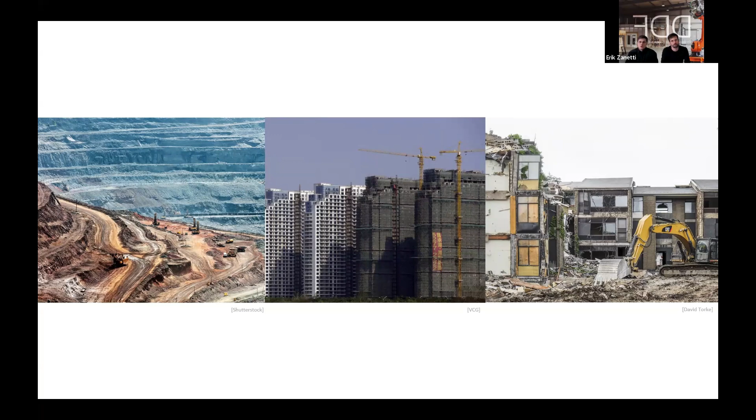So the motivation behind our research comes from the overconsumption of resources in construction. As you probably know by now, the industry is responsible for a very large amount of extracted materials, nearly 50%. And on top of that, the linear economic model that we currently use creates a lot of waste. For example, in the European Union, that accounts for 35% of all waste produced. So this raises a lot of environmental sustainability challenges, which is what we aim to address.

And as the title of our presentation suggests, our research focuses on the circular economy. So we explore solutions within both the biological and the technical cycles. When we talk about the biological cycle in construction, we are talking about, in our case, introducing innovative renewable materials. And when we talk about the technical cycle, we are talking about how we can use reclaimed materials, but also how we can design building systems that can be reused or recycled.

For example, we explore ways to expand the use of bio-based materials in construction. You can see on the left, one of those that we use is willow, along with earth-based materials and reclaimed materials, in particular reclaimed timber. And the common thread connecting all of these topics is that our research works with materials that are non-standard or not standardized, which means that we have a lot of inhomogeneous traits or highly variable properties. And this is something that usually we cannot deal with within the realm of construction.

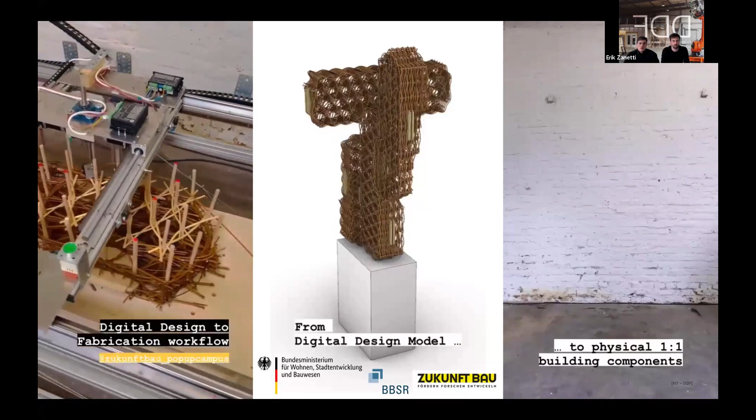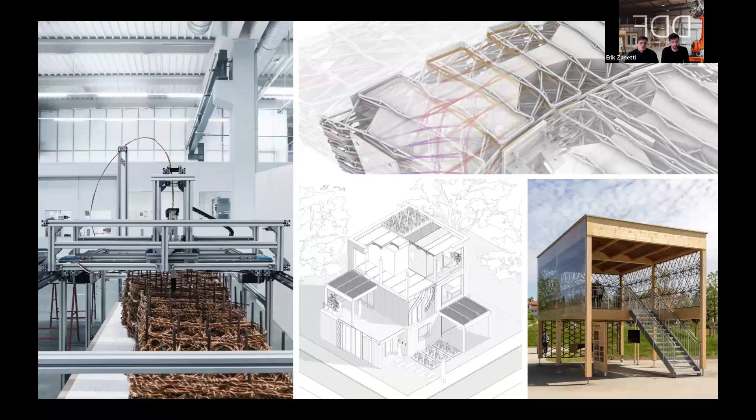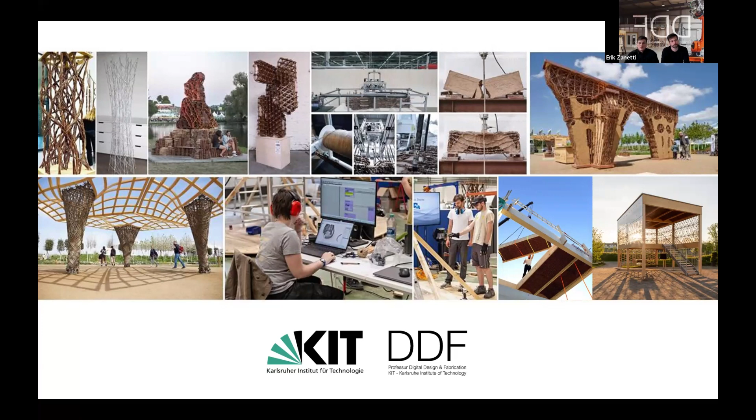So what we focus on is how we can leverage digital techniques to manage the complexities of these materials and to develop new methods that can help us overcome the current limitations. That can be fabrication limitations or design limitations. And our aim is to eventually introduce them into construction relatively quickly. As part of this aim, you will see that our research evolves from experimental to applied, and we try to deal with all aspects of construction and architecture. We do this with a lot of research demonstrators and with a lot of professional figures from different fields, and we then fabricate these research demonstrators in our lab together with our students.

And coming back to this slide, today we'll walk you through two of our research lines and their progress so far. The first focuses on willow, a rapidly renewable material, and its combination with earth. Daniel will be presenting this. And the second centers on our research into reclaimed timber, and I will be presenting this one. And with that, I'll let Daniel take it from here.

I'm going to walk you through our research from the last 3 to 4 years in regard to fast regrowing materials, such as willow and also earth. Erik is going to walk you through our wood research, and research into reclaimed wood in particular, later.

But the slide that I want to start with is that even though wood is a very nice building material that has been widely used throughout history for building and construction, supply and demand don't really meet each other for the near future. Meaning that our industry at the moment requires much more wood than the market can supply, and that is also unhealthy, leading to deforestation of our forests.

So regrowing materials in that sense, for example willow, which I'll showcase in a second, can be an answer as a quickly regrowing material that doesn't have this cycle of, let's say, 10 years that a regular tree would have, but is so fast regrowing that already after 1 year there is some structure that we could use for architecture. So the way I walk you through is chronologically.

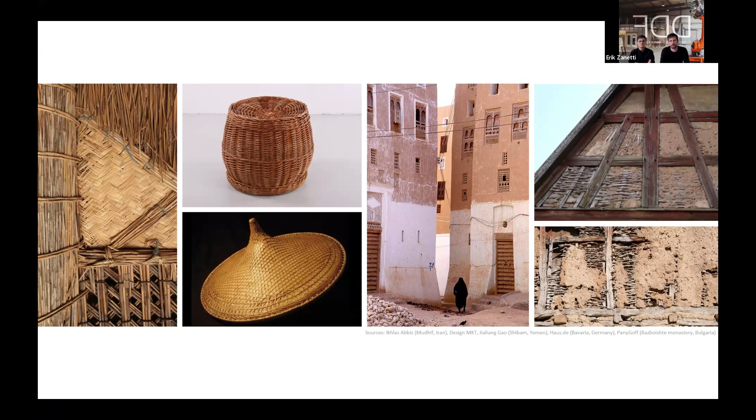From these manual tests, we rather quickly went into digital fabrication, and we asked ourselves the question: this whole process of manually weaving willow is really time-consuming, and neither the labor nor the time is available these days. So it has to be some kind of workflow that is digitalized, that can be optimized, and in the end become time efficient.

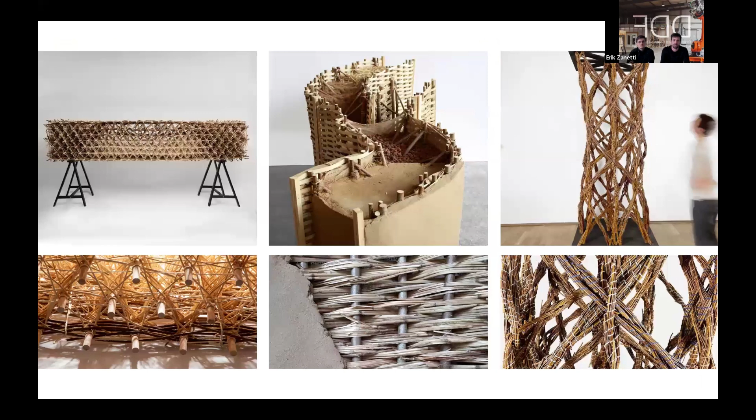As a result, we very quickly jumped into the one-to-one scale that we do at our professorship, which we think is a good way to experience early on difficulties that could come up in real applied work later. The examples you see here are, on the left, a beam with a span of 3 meters, a wall segment, and a completely free woven willow column. So already at this stage, we identified these 3 very characteristic building components, a beam, a wall, and a column, from which you could think of a lot of different applications for the built environment.

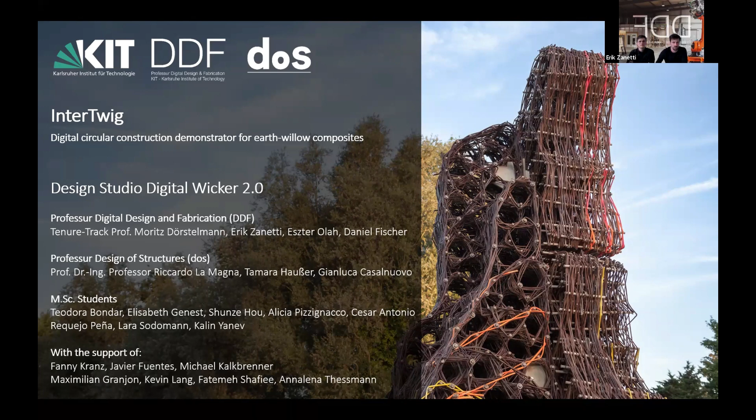Going from there, we had a follow-up project for a local festival here. The aim was, for a music festival, to present our research, but also to give the audience a place to sit and to inform them a little bit about the research that we are doing at this moment.

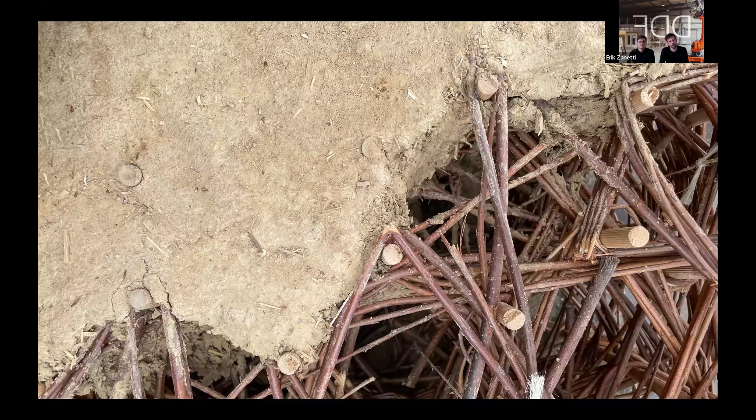And we looked into the material combination of willow on the one hand and also the natural material of earth. That's the second point that we're very interested in here at the professorship, the hybridity of materials. So not using just the pure materials, but looking into ways and configurations of how we can combine different materials and out of this hybridity make a stronger component.

The way we designed this here was also with a focus on prefabrication. It was with a focus on thinking on component level. So how could such a building component out of willow and earth geometrically, first of all, look? How could it come together?

How could it interlock? And maybe this picture that you see here, which looks very artsy, was of course also because it was an arts and music festival, but looking at this slide, you see already that there's a lot of computational design and a lot of computational workflows that informed our structure in the end.

So what you see here is the base, that's the bottom 3 layers. This is where we combined it with earth, always in these zones where we had pressure force. And on the top, there was just a vertical flip of the whole structure in which we tried to explore different kinds of patterns and depth and visibility that you could go through.

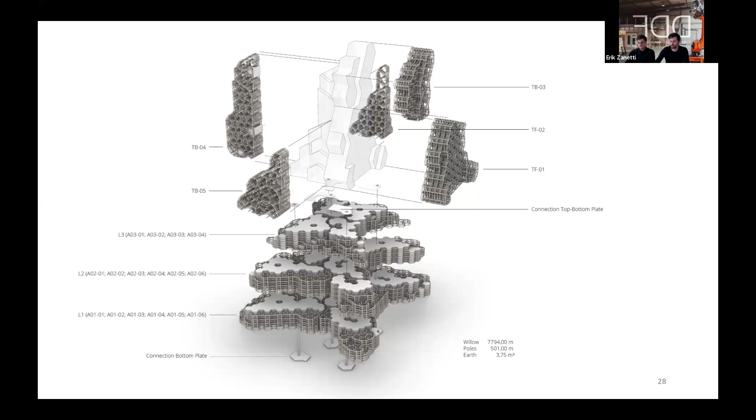Going more into detail of these components, you see that every layer, every fiber was computationally designed and informed from the very beginning. And these kinds of models would then also be the initial step that we use for fabrication. So this information goes into our fabrication setup,

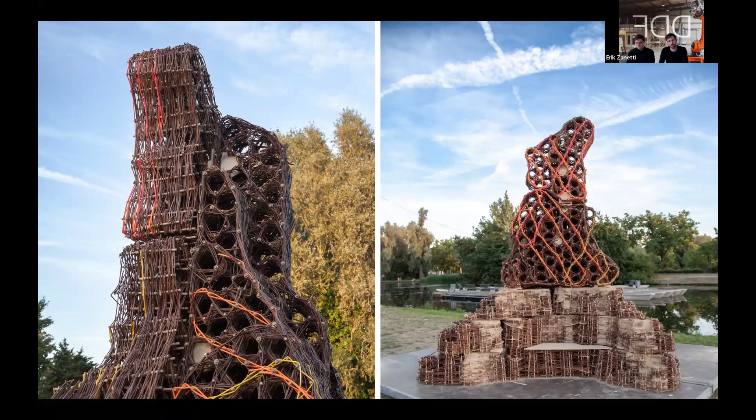and then in the end, together, of course, with a lot of help from the students here that work with us, forms these prefabricated components that were then transported onto site, assembled, and resulted in this very interesting first research demonstrator structure of this hybrid material out of natural fiber, willow, and earth.

Coming from this more arts and exhibition kind of design, the next step was a federal gardening show here in Germany. That was in '23, in which we tried to go from the sculptural aspect of this material system into a more building-oriented system, namely walls. So the configuration you can see here was meant for visitors to first of all explore again this material system.

So you have to imagine the Federal Gardening Show in Germany, the audience is rather broad, a lot of different people. And it was a great opportunity to inform them, get in touch with them, and talk a little bit about our digital circular approach to construction. And we used Reground, that was the name of this project, as a demonstrator of how we could prefabricate wall elements out of willow and earth.

And also use it as a showcase of how these components can be used in a circular manner for building applications. We started from the digital model, used all our analysis tools that you probably also use, Karamba, and then did the final calculations, final analysis, and always used this digital feedback on the placement of these different willow fibers.

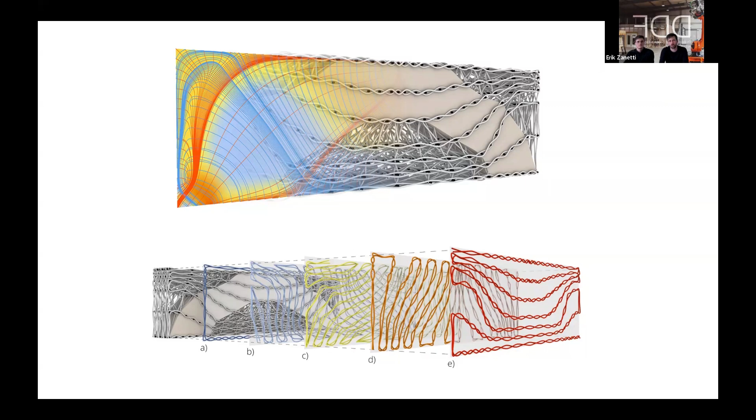So on the top, you see one of the components as an example, and on the bottom, how the different force analyses of these components also influence the laying of these different patterns and fibers and layers on top of each other. So in the end, they also respond to the structural analysis that we do for these components.

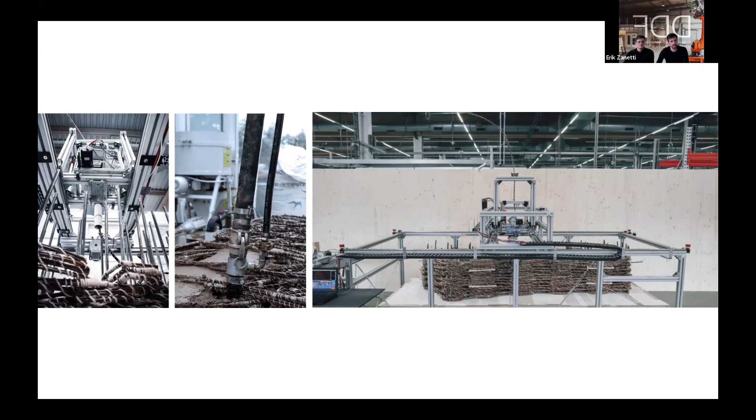For this project, we upgraded our fabrication setup a little bit. We went to a rather large-scale setup in which we were able to do components of 1 by 2 meters. We also upgraded it in such a way that we don't use single willow fibers, but we splice them together, which you'll see in a video in a bit. And we also used a machine for the first time to fill it with earth.

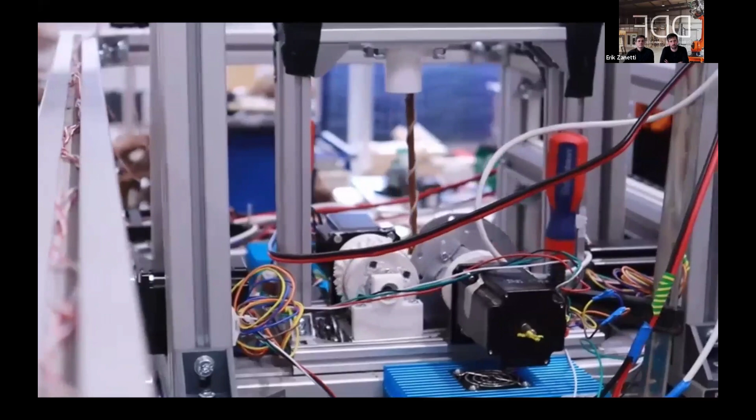I hope this video is fluent when you see it. So you see the fabrication process, in which our 3-axis machine is extruding the willow. And that's an interesting step in which we splice different willow fibers together into one, you could say, unlimitedly long natural fiber that is then laid on top of each other layer by layer.

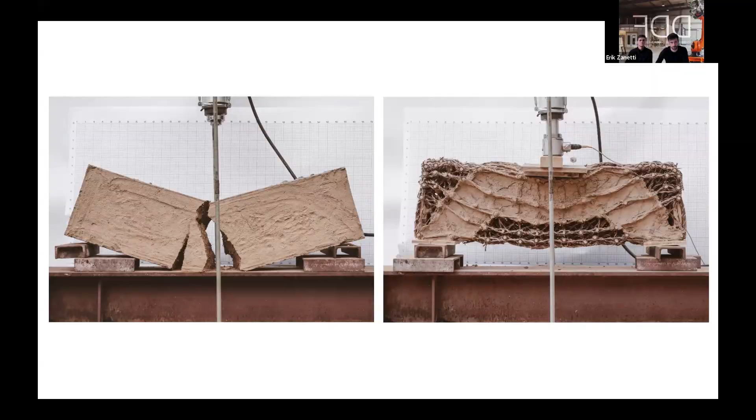Also to point out at this stage, it's interesting that on the left-hand side, a beam, for example, that is not reinforced, loaded with the same kind of load as the beam on the right side, is really less strong. So you could say the willow works as a natural reinforcement for these structures. And in our test, they are able to hold up forces up to 10 times or even more of the structural load.

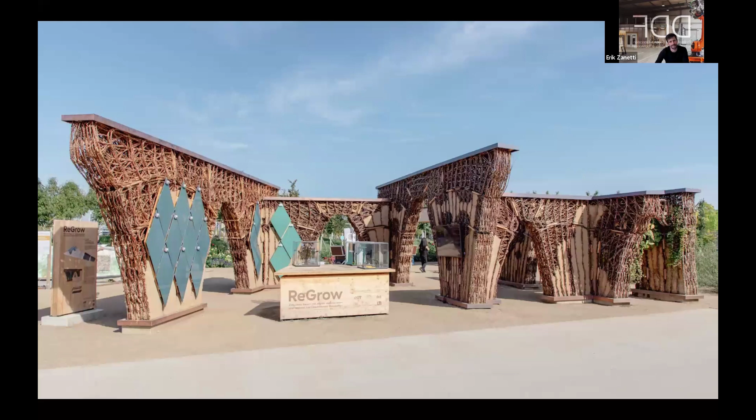Coming from this, we went into the prefabrication of the different elements. We loaded them again, put them on a truck, and then with the crane assembled them on site. Coming back to the slide that I showed in the beginning of the design, we ended up with this installation that gave the visitor the opportunity to walk through and experience different kinds of depth, different kinds of angles, to see how the spatial structure of the willow also works for different kinds of visual aspects, visual feelings.

Exactly. So then the next project. We had already worked in the artsy kind of aspect. We were sculptural, we had the wall structures. What we were missing was the horizontal elements, namely the ceiling slabs. For us, a ceiling element is a very interesting building element, since in its use it's very scalable and can have a big impact on the construction industry. And in particular, our research interest here was how this combination of willow and earth could work as a building system for ceiling components.

Usually, if we start on the left, over the centuries, wood and earth have been used in ceilings a great deal, but the earth mainly as a filling. That was for sound absorption, to give some mass to the ceiling components, but never really structurally. Then there was a development that the structural aspect could come from a geometrical shape, for example, structural caps. But what we tried to do with this research is to combine all of this into one building component.

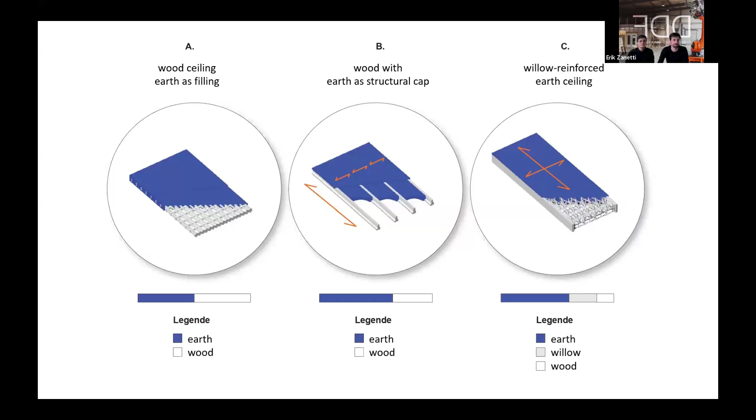We try to reinforce with the willow, as you've seen in the picture that I just showed with this beam, to use the willow as a rebar. You could compare it to steel reinforced concrete. In our case, it's willow reinforced earth. So these components can take loads in multiple directions, not only in one as the cap, or not only as a filling, but into several directions.

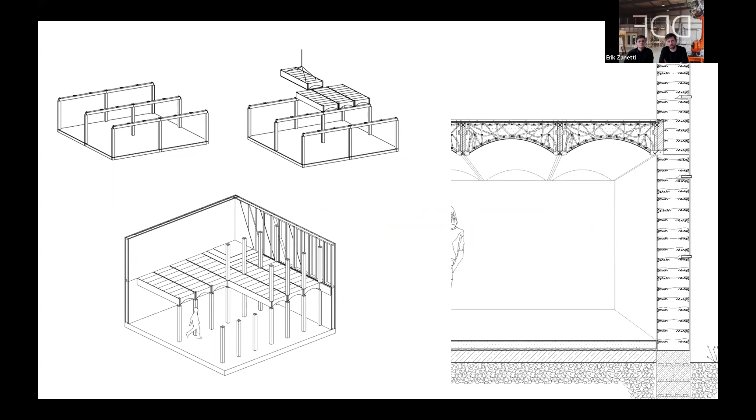So the idea here was, again, prefabrication, again, the material system of willow and earth, and then have them as a component that can be prefabricated in a nearby company, delivered on site, and used in multiple kinds of architectural systems. Here, for example, columns could also be a wood frame structure. It could be monolithic walls. So we designed it with a minimum amount of wood, thinking back on what I said in the beginning, that the supply and demand of wood don't really meet. So we try to use wood only where it's necessary.

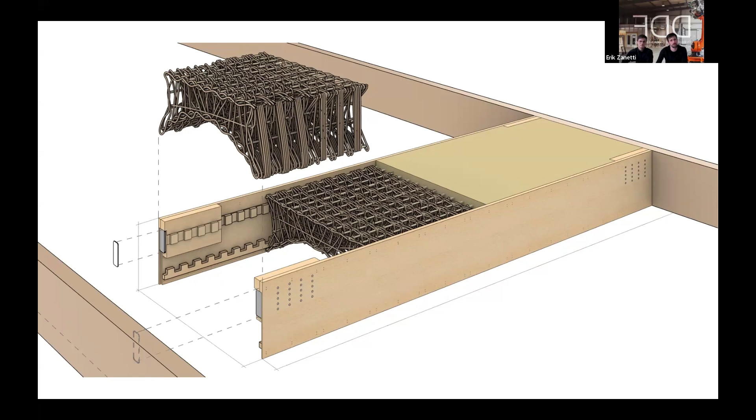We had these two thin wood beams on the left and on the right side of the components. Then geometrically, you see there's a kind of interface between the willow baskets and the wooden beams. And this all got filled with earth. The nice effect of this geometrical design and the combination with the willow was that in the end, here you see the component, since it was filled, we got a component that was structurally loadable in multiple directions.

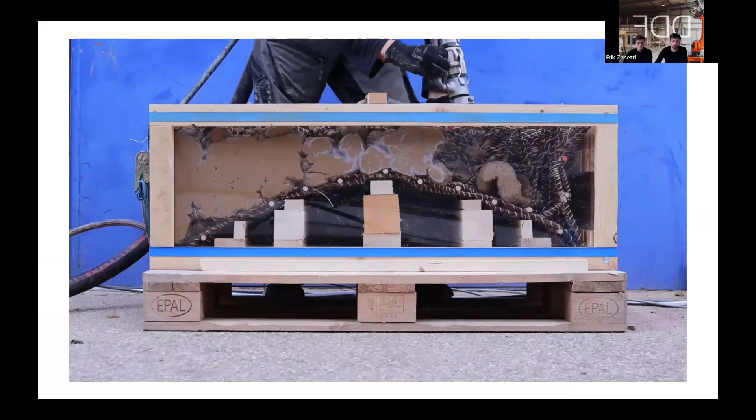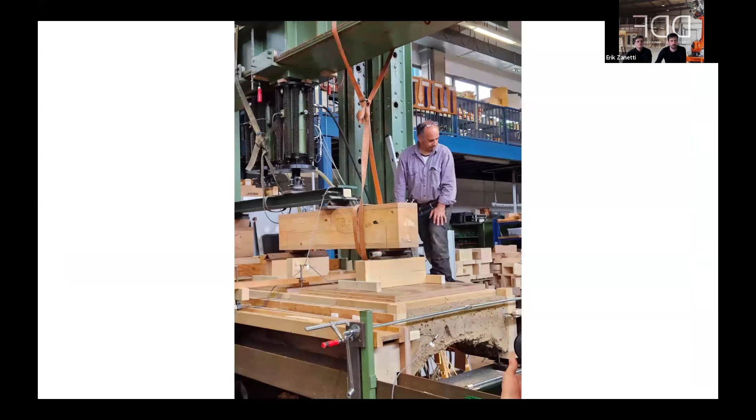I have a quick video that gives you an idea of how the filling process works at this stage, still manually. Now we're also working on automation for this. And since this research was more and more application oriented and we wanted to use it in the real world, we went through extensive structural tests. Here on this video, you see the moment of failure. We were able to load our ceiling component with 130 kilonewtons, which equals about 13 metric tons. So it's quite a load for a building, and that gave us confidence that this development was really going somewhere, and that this material system is promising in the configuration for a ceiling system.

Here you see some applications that we envisioned. It could be a modular building, it could be multiple story, it's highly scalable, and of course, completely circular and recyclable. One impression of how it could look as an interior. Here we are also able to play with different kinds of articulations. The way in which we lay the willow fibers could also give a design opportunity to architects and designers. And together with the material of earth, it also has a really nice natural feeling.

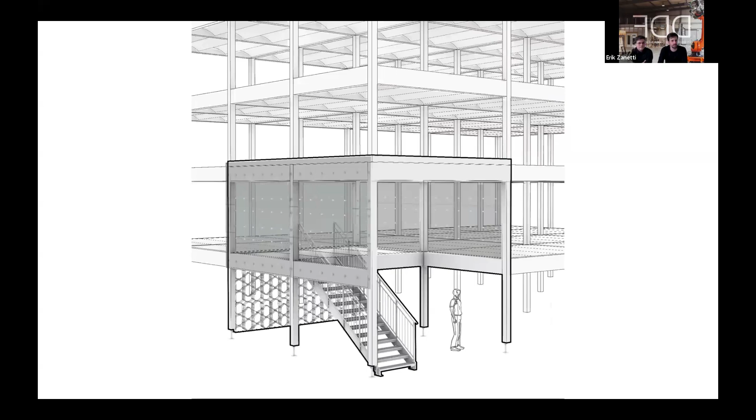The next step after this was then going into real world application, again for a gardening fair, this time regional, in which we were able to develop the project called Residence, which was meant as a research demonstrator for a multi-story building, but building on exactly these kind of research projects that I've shown you to this point. And it was the first time that we were able to go for a multi-story mock-up in which you could not just see it as a ceiling component, but also walk on it as a ceiling component.

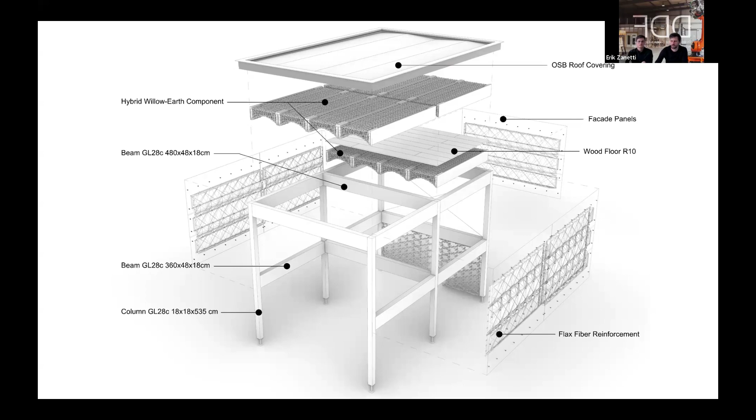So it consists of multiple different research layers. We had a facade that was robotically woven out of flax from a company here. We have a main primary load structure out of wood, so again, minimal use of wood. And then we produced altogether 12 of our ceiling components in our fabrication research hall here. 4 of them completely filled with earth and also cladded, and the top one then open with willow, so you can get also an idea of the aesthetic opportunities, let's say.

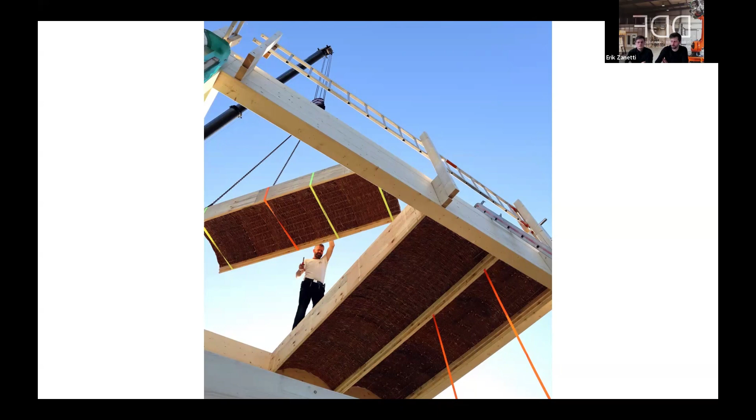Here you see a picture of the finished result with the stairs, so visitors could also go on the first story and experience how to walk on these components. An image from the assembly, so the prefabrication not on site, and only the transportation and then the assembly on site was a huge aspect that we tried to achieve here, and that was successfully done.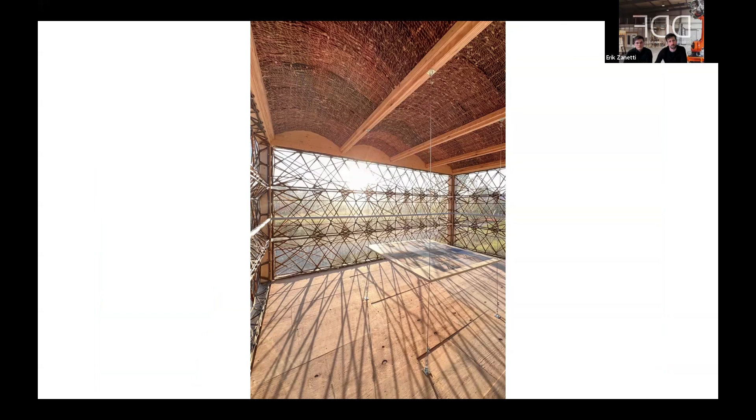Some images of the aesthetics, if you look at one of these ceilings from the bottom, and of course there are also different kinds of finishes that you could apply on them. On the left, the top stories, you see the pure willow. On the right side, for the ground floor, you see that plastering it with, for example, earth or other kinds of mineral natural materials is a potential to articulate these a little better. Here's one impression of how the freely woven robotic flax facade also works together with shading aspects.

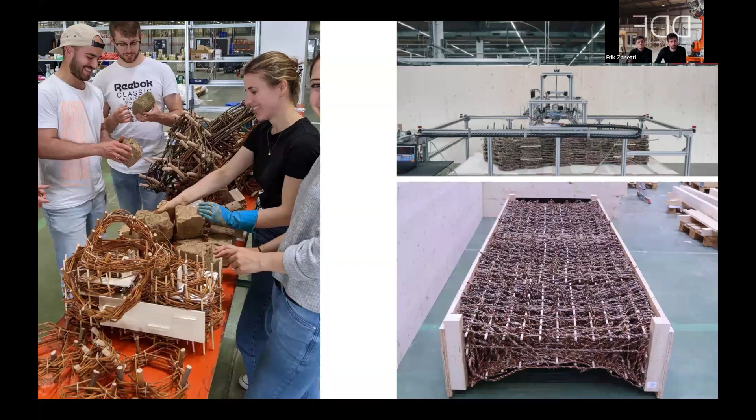And kind of summarizing the slides that I've shown you, from the very early stages of manual research within a couple of years, going to one of these components. This is really what we are trying here at DDF to achieve. So from first exploration into really quickly going into one-to-one scale and just doing it, just applying it, and see what is maybe going wrong, what is nice, what can be improved next time, and then developing it step by step for the next projects, with the goal to finally bring it into real-world application. And this is something that is in planning at the moment.

So on the very right, you see the IBA 27. This is our international building exhibition. Hopefully, we're able in 2 years then to have also 2 full residential buildings equipped with our hybrid ceiling structure out of this willow reinforced earth.

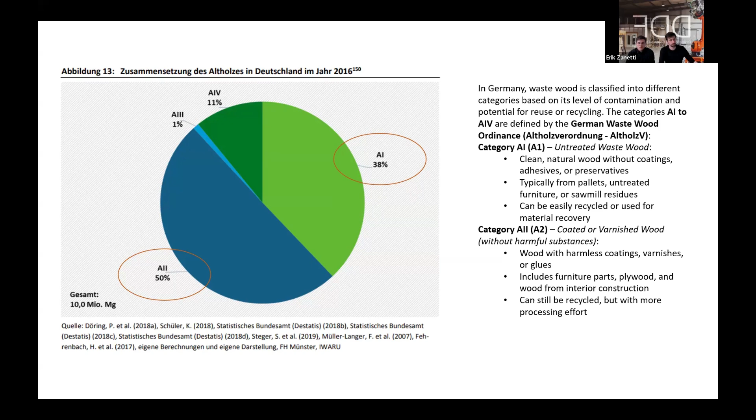So in Germany, there are different categorizations for waste wood, and A1, for example, that is highlighted here, is waste wood that does not have any contaminants, does not have any coating, so it's immediately recyclable. A2, on the other hand, has some coatings, but they're not harmful, so it needs a little bit more processing, but it can be used. These 2 categories account for 88% of the waste wood that we have in Germany.

However, most of it, although it is reusable or recyclable, is actually incinerated at the moment, and only 10% is being recycled. And when we talk about recycling, we need to introduce another concept, the wood cascading concept, that basically explains how we go from the forest to the wood products, to timber, and then how we get to incineration. What is really important in the wood cascading is that every time we have a step down, we actually have losses.

And when we talk about construction, the biggest loss is the structural loss, because obviously any wood product for construction depends completely on the fibers. So once we chip them up, then we chip them down into smaller particles, we are losing those fibers, therefore we are losing also the structural capacity of the wood.

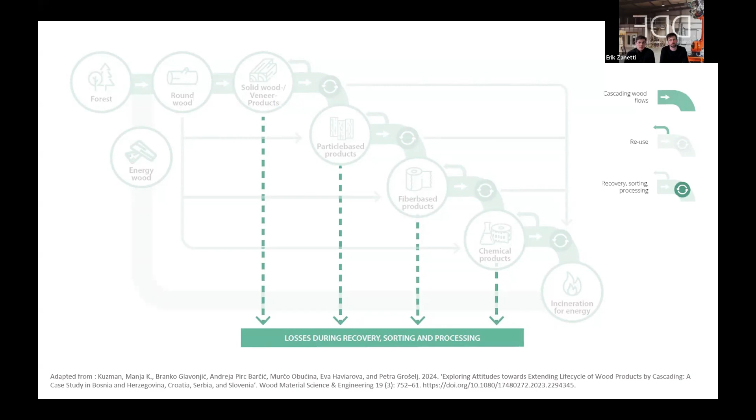So what we wanted to focus on when we talk about reclaimed timber is how we can basically reuse the components, so we can create one or multiple life cycles before it continues cascading into this process. So here it is shown with a small arrow, but it's a really important step that we want to focus on.

So what are the barriers at the moment in using waste wood? What I mentioned earlier in the beginning as well is the complexity. We have a lot of non-standard and irregular sizes. We don't know a lot about the qualities. They are obviously degraded qualities, so we need to know if we can actually use the pieces. Compared to sawmill wood, we also don't know what wood species they are and what types they are. And we also have a lot of contaminants. That means either coatings, but also, for example, nails in them.

Obviously, there is also a problem in the supply and demand. We don't know when we get certain types of waste wood. And the third big barrier is related to perception, knowledge, and awareness. Some people might reject the waste wood because it is waste.

In what way can we contribute to solving these problems? For example, the fact that we have a lot of non-standard and irregular sizes: we can digitize those pieces, so we can reconstruct them, and we then can use what we are good at, which is computational design, to deal with this complexity and create strategies that are made on purpose for these waste wood pieces. Then, thanks to connecting computational design to digital fabrication, we're able to scale them quite easily into production.

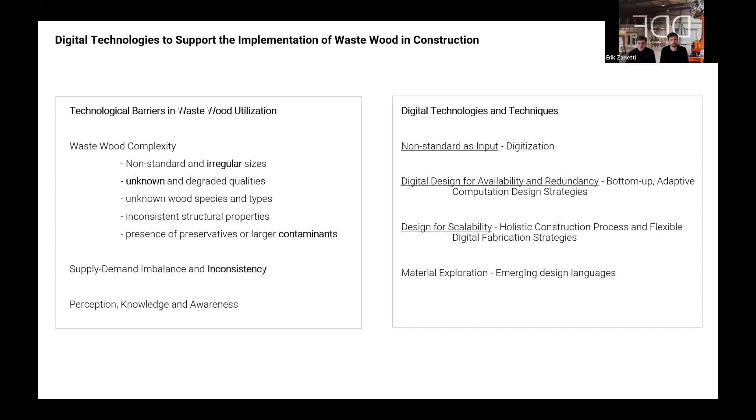And last but not least, we as architects are able to create a design language that makes it more acceptable for the general public. So these were our aims. And now I'll walk you through some of the projects, in a chronological line.

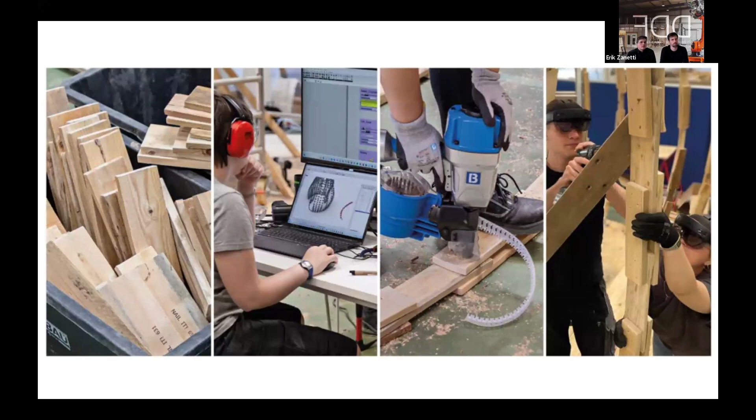So this was one of the first ones that we did. In this case, we started from waste wood coming from pallets. And the aim was to create a workflow that goes from sourcing to digital design to digital fabrication with augmented reality. What we are also using, and is quite important, is wooden nails. It's the third picture from the left.

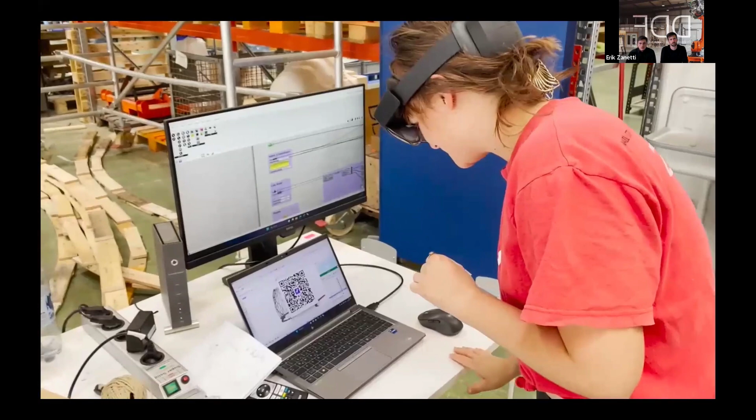Reconnecting to the wood cascading concept, essentially we are creating a component that is made of only wood, and in this way we are also able to recycle it later if it cannot be reused anymore. Here is a quick video of how we use augmented reality to reconnect what we input as a digital inventory. The concept for this research demonstrator is based on ribs that are extracted from the initial design and then reinforced by cross bracings.

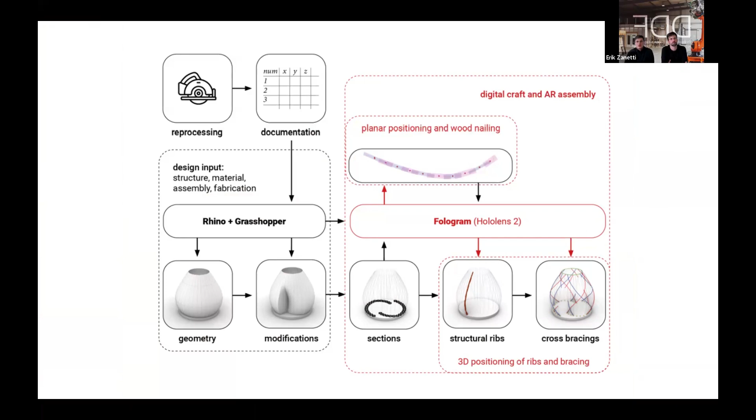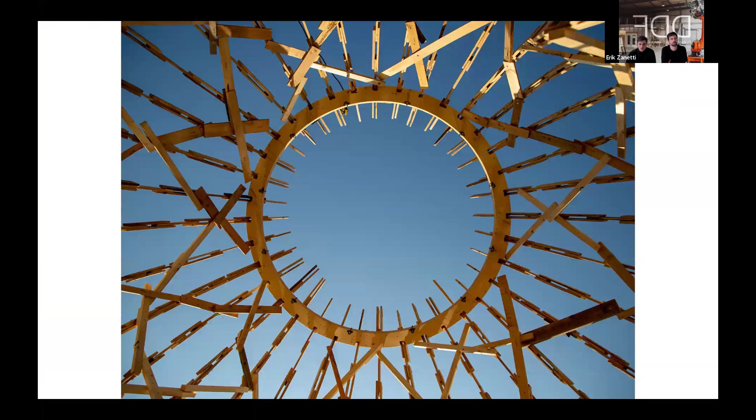And here you can see some impressions of the pavilion, which, as we started in the beginning, is also quite free form, and then we try to move closer and closer to construction.

At the same time, we were doing this with a design studio together with our students, where we looked into a few other concepts, starting, for example, from a wall. Although we still use the workflow that I showed earlier, here is a bit of a different computational design workflow. In this case, I think it's quite obvious. It's a nesting type of design approach, which is what we usually use when we use CNCs or laser cutters and we need to compact a lot of pieces into one piece of wood that we need to cut out.

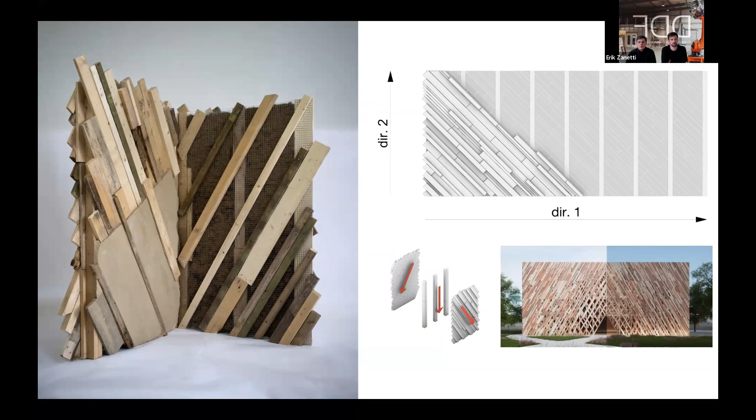But we also try to expand this concept into three-dimensional aggregations, creating, for example, linear elements, or also a floor slab that works with earth and uses the irregularity of the waste wood to create an interlocking based on geometry for the two materials to work together.

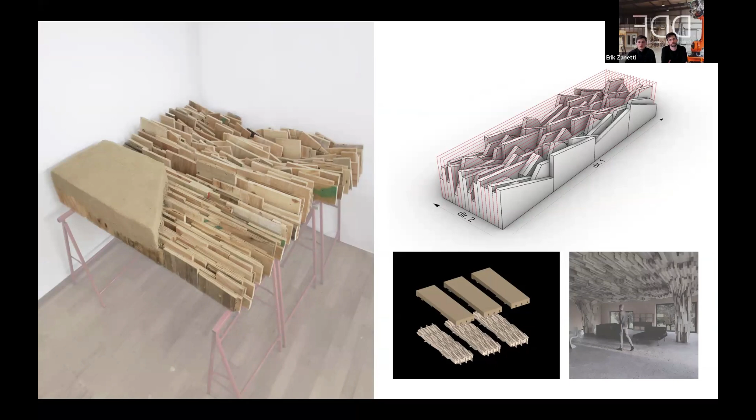So the underlying concept comes from bin packing algorithms, which are often used in the container industry or the packaging industry. The basic concept is that you have a volume and you want to be able to fit a lot of different sized packages into this volume.

Usually you want to minimize the space that is left. But rather than this optimization, our focus was on the fact that you can use a lot of different geometries and it gives you a lot of different solutions. It is based on an iterative process.

So you start with one package and then you start accumulating more, aggregating more and more packages. And essentially every time you change the order, you get a new solution. And that for us was what we wanted to use for our system. And we adapted it to what we have. So we have an inventory that is quite varied. Then we want a building component, and we have a few parameters that we want to change.

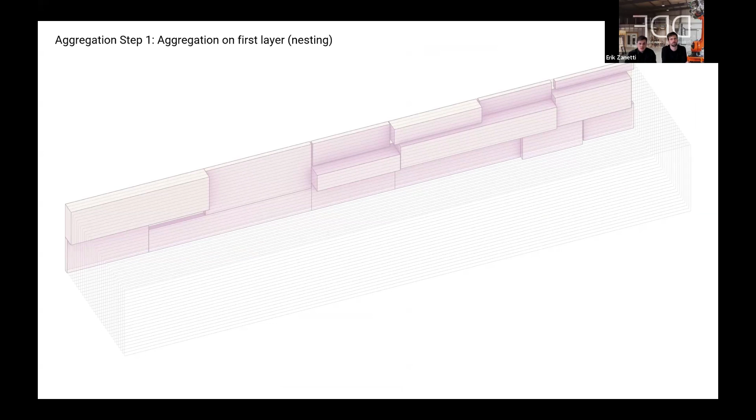I quickly show you how all the concepts, the designs that I showed earlier, are based on this basic concept where we start aggregating on a first layer, for example. Then we create more layers where we subtract the geometries that currently exist, and we continue aggregating until we reach a final component. And this allows us to create a lot of different geometries as well, a lot of different construction types.

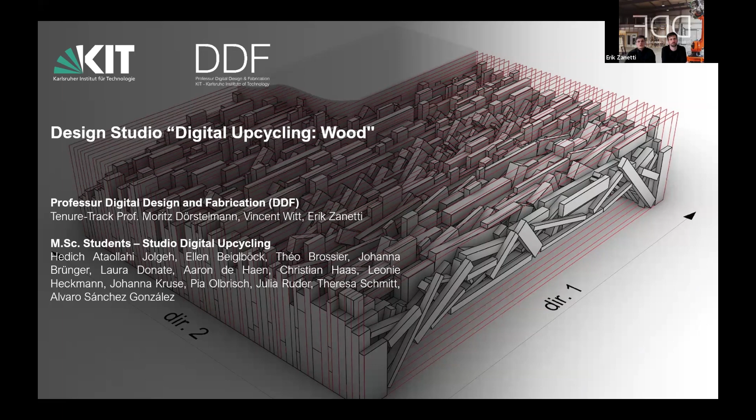But what we decided to focus on, and this we continued in another studio, getting closer and closer and with more details to construction, was the floor slab. So as I mentioned earlier, it is based on the geometric interlocking between the two materials. So normally when you have a beam or a floor slab, you have this problem of the shear interface. You normally have compression on top, tension on the bottom.

And when you have two materials like in concrete wood, you have this shear interface, which is conventionally solved by integrating metal screws or metal plates. But that for circularity can be quite challenging because then it's very difficult to separate those materials afterwards. Whereas in this case, when we use this geometric interlocking, it's quite easy to then separate the two materials. And that's also the base concept that we use for the wall of earth. Basically, earth can be just dismantled as long as it's not baked, then it's easy to be taken apart from the material that is connected.

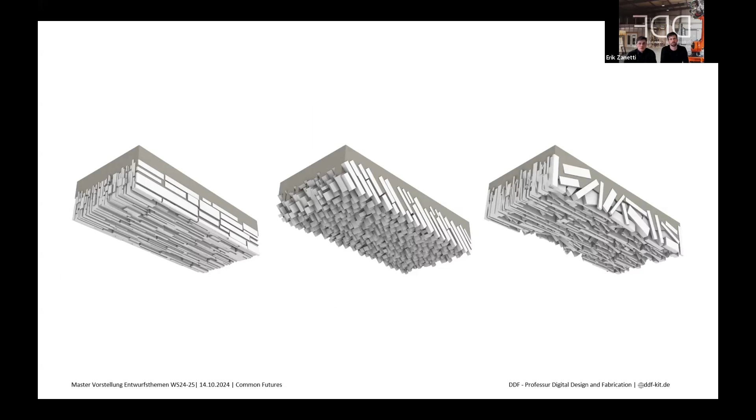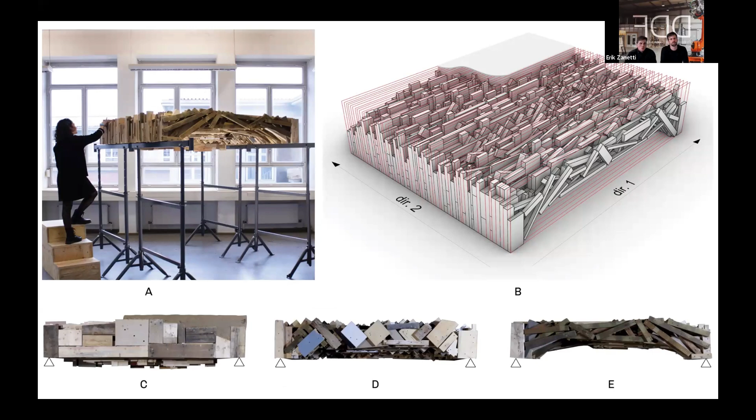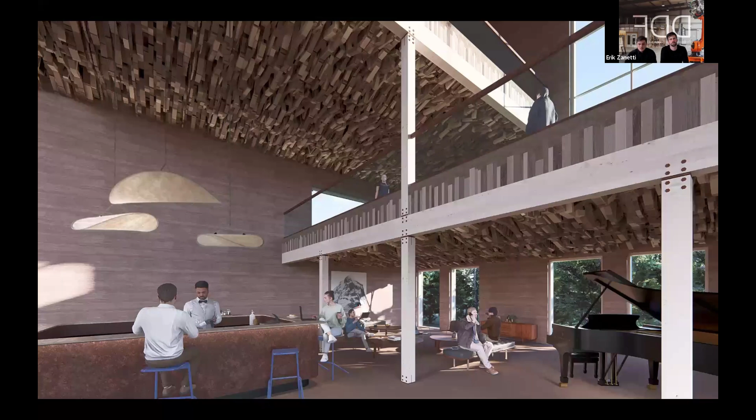In this studio, we looked into a lot of different parameters and how they also give a certain geometrical articulation in the components that we then apply to a one-to-one prototype. And we looked into how the different parameters come together. At the same time, as you saw earlier for the other research line, we always look into how we can then apply them to construction and also architecturally how they would work.

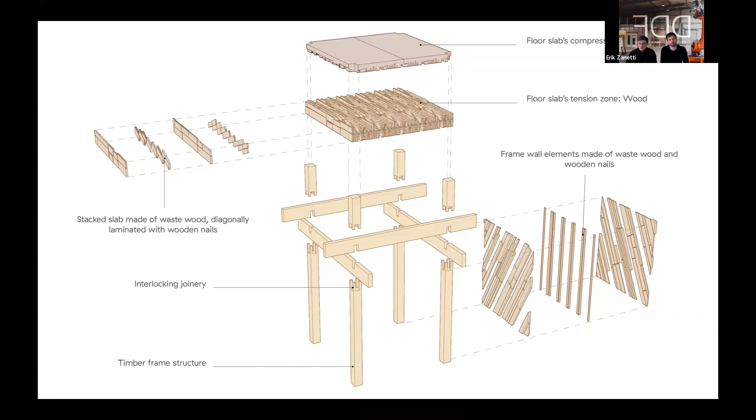We then continued with our latest research demonstrator in this research line, which is called Terra Timber. Here we applied a few of these concepts that we had. So you can see the floor slab, you can see the wall, and we also had a frame structure that is made with an interlocking joinery system rather than with metal joinery, so it could be easily disassembled or reassembled. As usual with this research demonstrator, as you saw earlier with our residence project, we try to imagine them as part of a bigger building, so we could later scale them up.

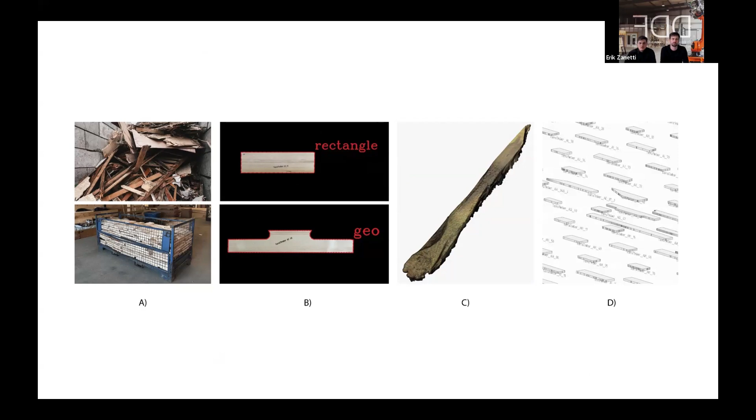But with Terra Timber, earlier we explored a lot of different options, but what we wanted to do here was to really go systematically from the sourcing to the digital design and to the digital fabrication. So we started from a very specific type of inventory, which is industrial offcuts from a company that makes prefabricated houses. It's a reduced complexity inventory because in this case, we don't have a lot of the problems coming from the quality of the waste wood, but it was good for us to have a starting point.

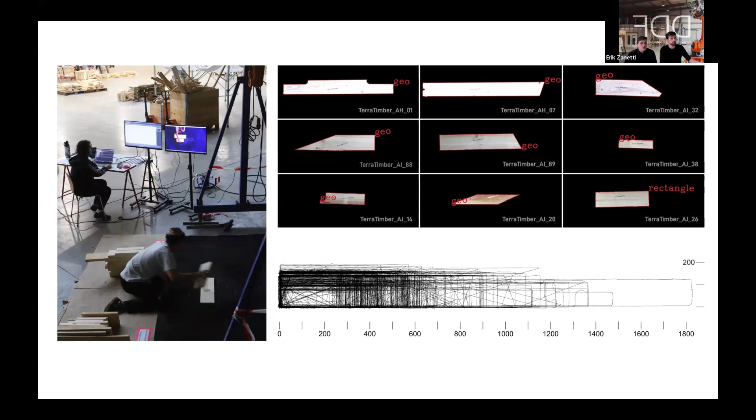We then use photogrammetry to reconstruct these pieces. So we are approximating the contour of the pieces. And you can see on the bottom right what our inventory looked like. And in this way, we're also labeling all the pieces as we go, so that we have basically a physical and a digital inventory that we then use to look into different types of designs and evaluate them, seeing how they worked, not only aesthetically, but also in terms of fabrication and structural design.

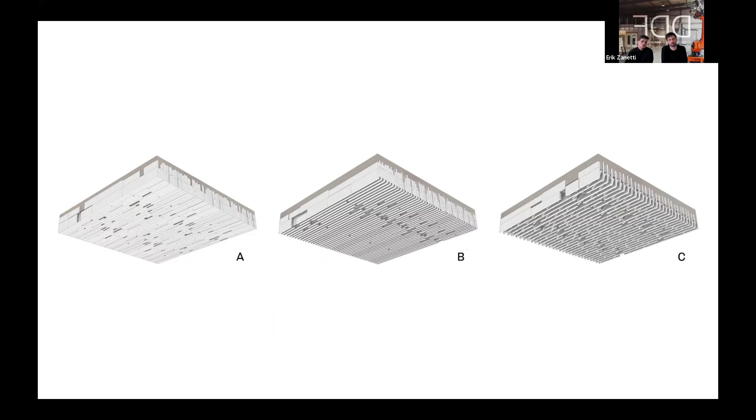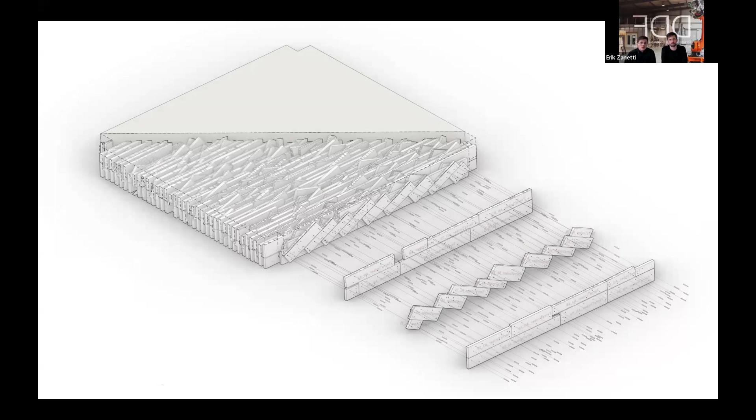And we eventually landed on this configuration that takes principles from diagonally laminated timber. As you can see, we are using different angles for the different layers. Again, we're using wooden nails as in the previous project, and we are calculating where they need to be placed. And essentially we then use augmented reality again to reconnect the digital to the physical. So in this case, together again with our students, they would see what is on the TV screen, and they are able to reconstruct what is in the digital through augmented reality.

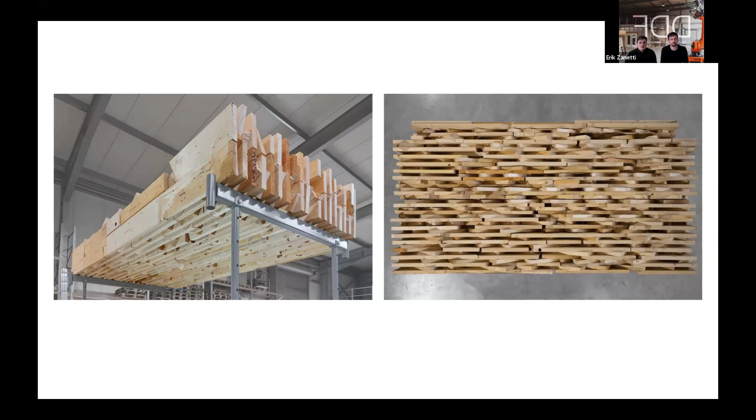This is one of the components before we fill them with earth. And you can see a little bit on the left, also our design intent is creating kind of a surface that is kind of flat on the bottom, although alternating with different layers. But the right picture is instead taken from the top, where you can see this very patterned surface. That is what I mentioned earlier: this irregularity that comes from the process is what we use to create the geometrical interlocking with the earth.

So this is our final component, which for the moment we tested just to make sure that it's safe to be used as a construction element for the research demonstrator that we created. But we will go further into the testing later as well.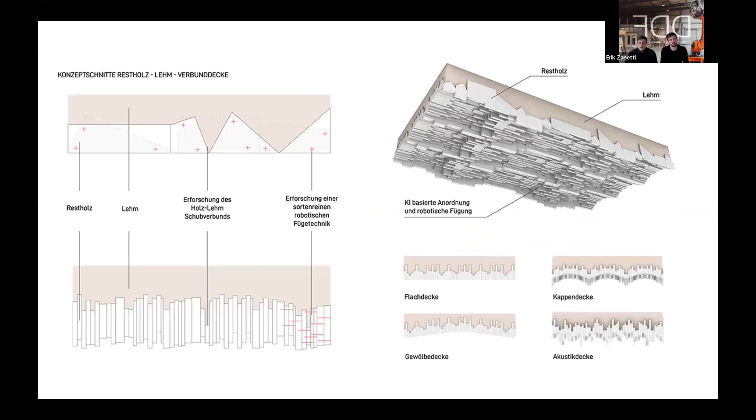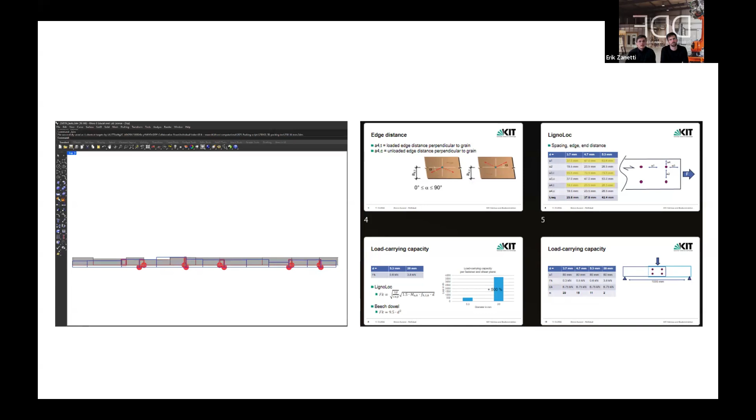Obviously, there is still a lot that we need to explore in terms of scalability. And this is something that we are working on also at the moment, both Tanya and I. Some of the next steps that we're working on are, for example, using image recognition to extract even more data from the reclaimed wood that we have. We are also looking into having more precise digital design models that are based on rules that we're working on together with structural engineers, so that we can really get step by step into closer iterations for construction.

And one very important part is that we believe automation is obviously very important for this, because it's a very complex inventory of materials. It would be really difficult to work if we had to do everything manually. So at the moment, what we're working on is also to use robotics. We now have our robot in our fabrication lab, and this is what we're working on at the moment.

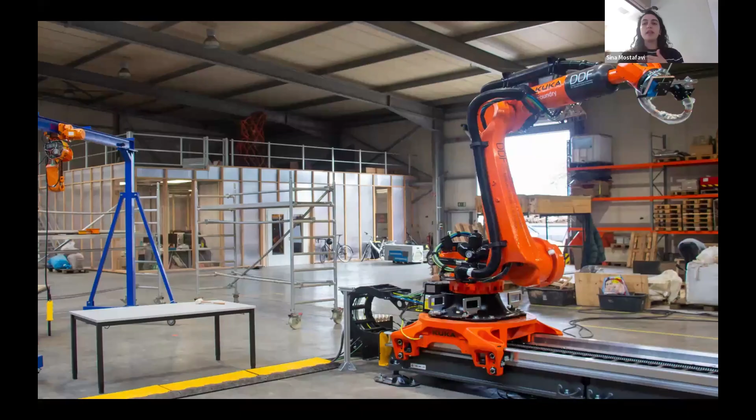So, what I've seen is that you're using reclaimed wood with, I guess, earth-based molds. Because you also do the prefabrication, I have a feeling that this would be a little heavy for transportation. So my question is, do you see in the future that you would also construct this on site, especially since you're developing the assembly using robots, and you could probably do the assembly using mobile robots on site? That's one.

Yeah, I think so. Maybe I start and you can join in. We are looking into the different options. I think the only thing with earth is it can be a bit complicated to do on site. It is true that it's quite heavy, although, for example, in the next iterations, we're working on reducing the depth of our components. The problem with earth is that it takes a long time to dry. So doing it on site can be a bit complicated, especially because then we need to deal with the weather or any conditions that we find on site. So in a way, prefabrication helps us a lot with earth. We know that we can control the environment that we are in, and that helps a lot with earth-based prefabrication.

That's currently what a lot of earth construction is, but it's true that there is a potential, especially if you have a multi-story building and it's already covered, to do it on site. And we will definitely look into that. I think in terms of wood, we are also looking into whether to do online or offline fabrication methods.

At the moment, our method is very offline, right? We scan the pieces, we have the inventory, and then we reconnect them. But that requires a big inventory, which can be a bit complicated. What we're looking into next is also if we have a very small inventory, and then it needs to build according to that small inventory, which could work well on site as well.

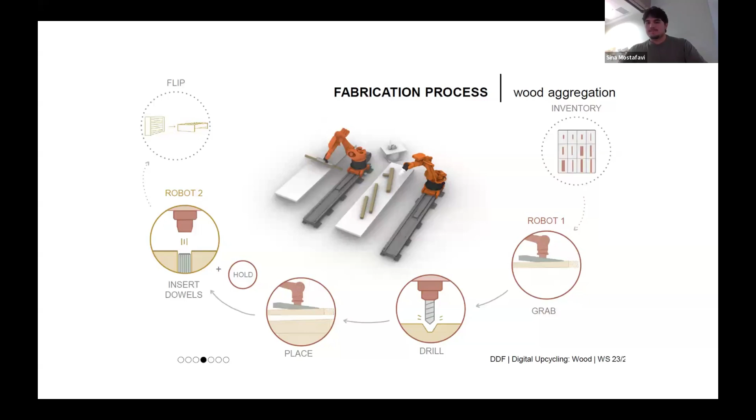Hi. So my question was, for the first project with the willow, was there a reason why you decided to focus on willow specifically, or is there another wood type that you were trying to test out?

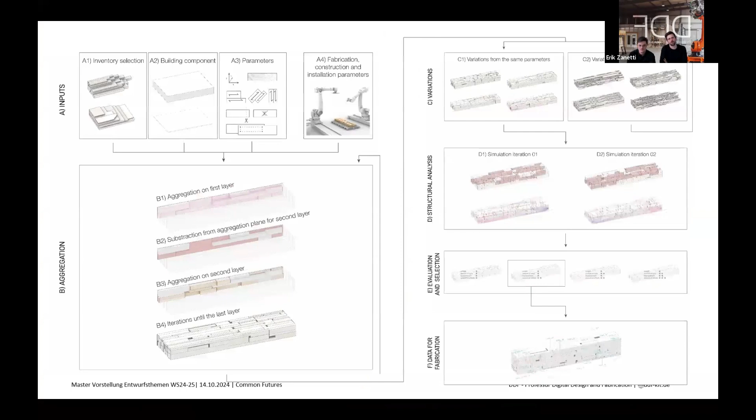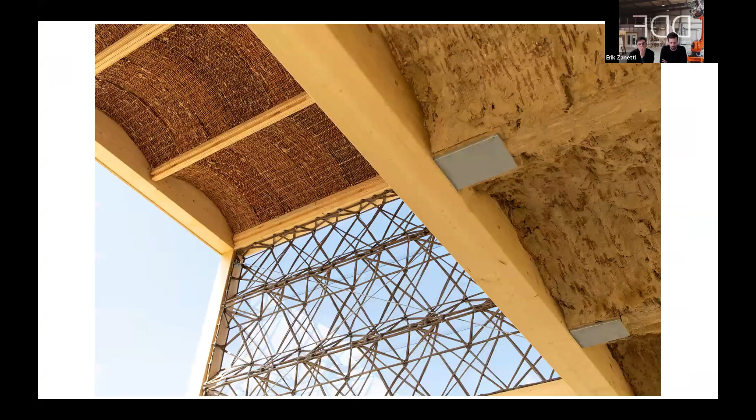Good question. The main purpose to decide for willow was the fast regrowing aspect. So willow, in the properties that you've seen, with about a third of an inch, so one centimeter in our metric system, we can already harvest after one year, in comparison to a tree, maybe after 10, maybe after 12. So this is one of the reasons that we used willow.

And the second one is that willow here in our area is also considered to be a regional source. So our agricultural environment is a good fit for willow.

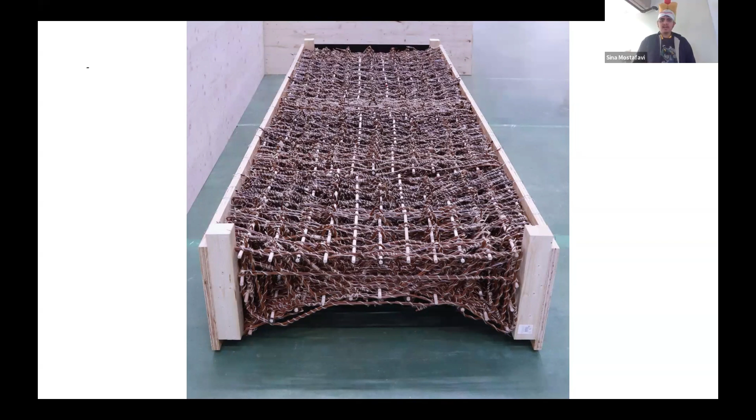Okay, and I know you were talking about how you were trying to test out hybrid materials, like working willow with earth-based. Have you tried to test that out with different materials too, or just earth and wood for now?

So in the beginning, we looked into different materials. I was trying to get back there, but I realized it's a lot of slides. So in the first iterations that we did with our students, we also looked into different materials. But as Daniel explained, we wanted to focus in the beginning on the local context and creating sustainable systems. We wanted to look at what is available here.

What we are doing now is also expanding this research. Actually, it's not what Daniel and I are working on, but some of our colleagues are looking into other contexts. For the moment, they're looking into, for example, working in Ghana and how we can use the local context and apply some of the principles that we found from this research.

I think you mentioned if earth or other materials, maybe. Yes. So the point with these materials is that often on their own they're not structural. So we needed one additional material that could hybridize with them. And ideally, they create a hybrid system that is better for both of the materials. In this case, it works because willow works well for tension in earth, and earth gives the stability to the willow that we need.

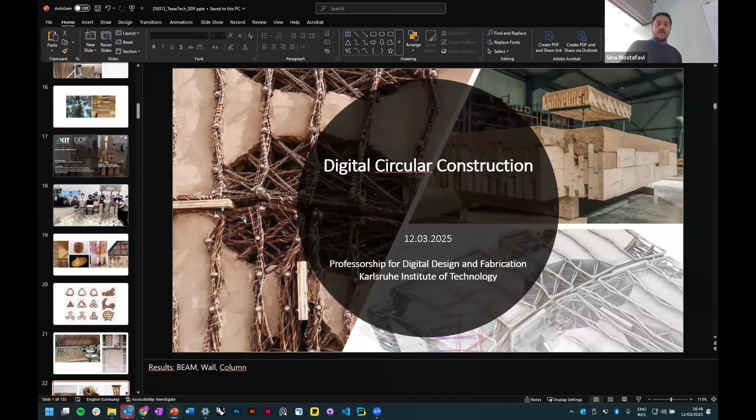Partly because AI and machine learning is becoming a trend, but partly because you're creating a lot of data, do you see a tangible and impactful implementation of AI and machine learning in what you're doing? Have you done that? If yes, could you provide some examples? If not, how do you see in the future this can be more integrated as part of your workflows?

Yes, so we are working at the moment on how we can use AI and machine learning, as we're working mostly on reclaimed timber now. One of the first ones is on sourcing, as I mentioned: how we can implement image recognition for the sourcing of the wood, and extract more features that help us understand better what type of material we have in front of us.

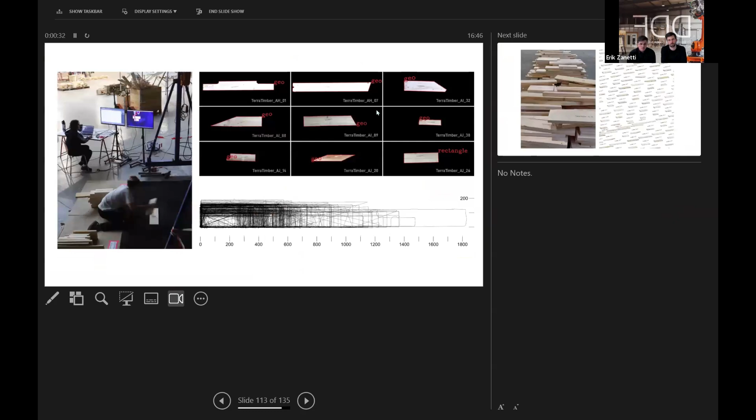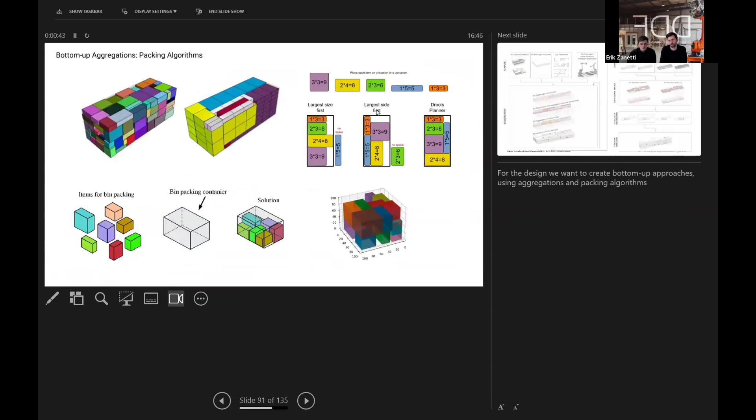Another one is also on the bin packing. Let me go back to the slide quickly. Here. Switch the screens. Yeah, sorry, I'm showing you the wrong screen.

For bin packing, one of the problems is that it really depends on the order of the pieces. Every time we swap one element, it will give us a completely different solution, which creates a design space that is huge. And this also does not allow us to optimize easily, because the solution is not obvious compared to the input. So we are also looking into AI solutions to better understand our design space without having to optimize in the standard way.

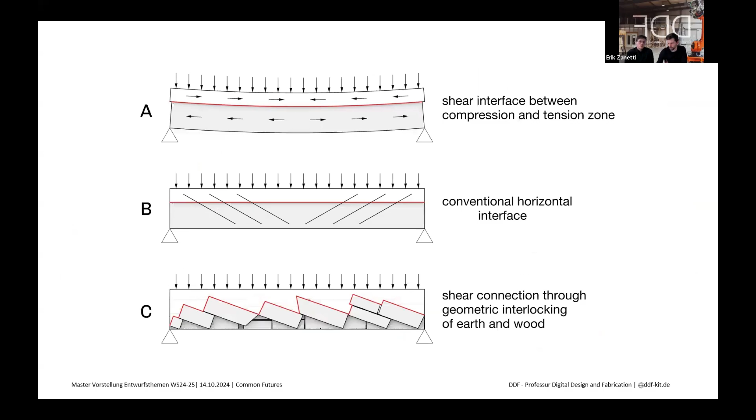And finally, from the fabrication point of view, we are also looking at how we can let the robots learn how to deal with the tolerances that we find within the system. We are still at the beginning of this, but that's one of the research lines that we are currently working on as well. Yeah, exactly.

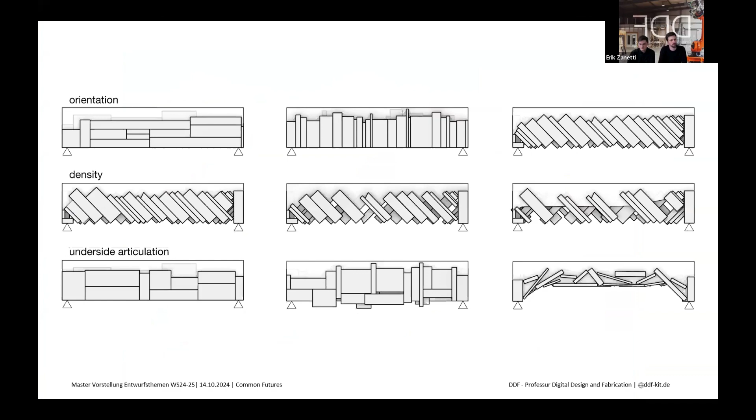I don't find the slide, the one with the AR emplacement for Terra Timber. But I think AR can become really interesting for what Erik just mentioned, this adaptable fabrication. If you consider, for example, a craftsman placing reclaimed materials on top of each other, and we film this and create a data set of how we would do it as a human, explaining it maybe also with voice as an additional data layer, then a machine can learn from this, and this can be transferred to robotic fabrication in the end.

For example, I just comment the way in which I would put the pieces in this picture together. I take my piece, I rotate it because then I overlap with the next two pieces. I put my nails so that I will shoot through at least 3 coherent layers underneath. I took this side because it was the better surface. I didn't shoot my nail here because there was a knot. This kind of information you can feed into a system that can learn, and that, we believe, can help in the end to inform and automate this process.